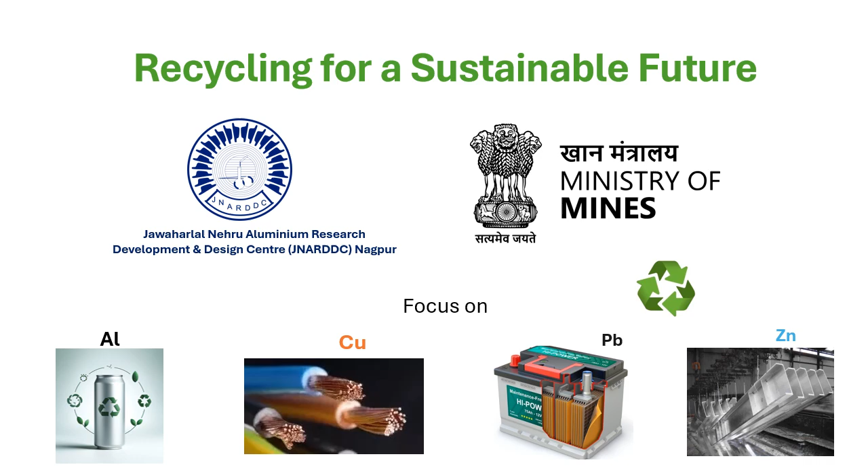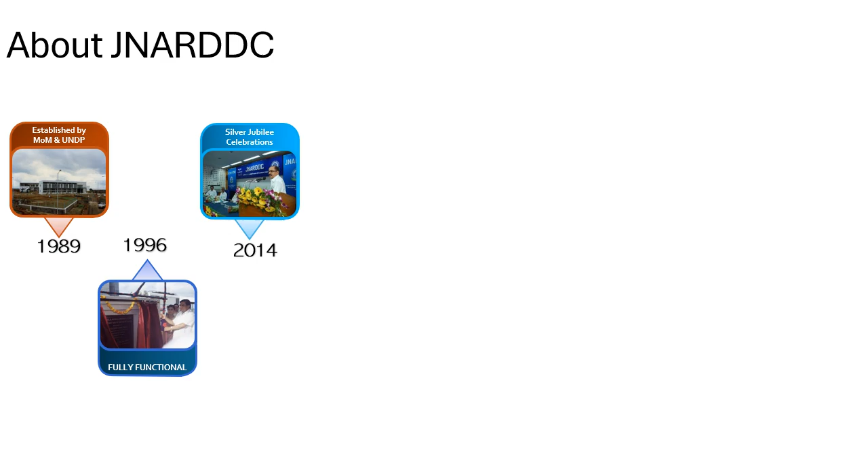JNARDDC, established in 1989 under the Ministry of Mines and UNDP, has been a beacon for the aluminum industry since becoming fully operational in 1996. The institute reached new heights in 2014 under the leadership of Dr. Anupam Agnihotri as director. In 2020, we acquired a state-of-the-art 14 meganewton capacity direct extrusion press, significantly advancing our research

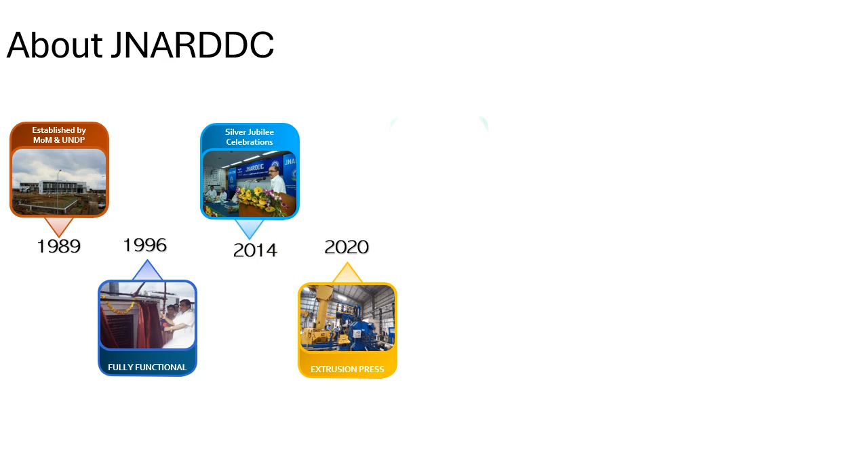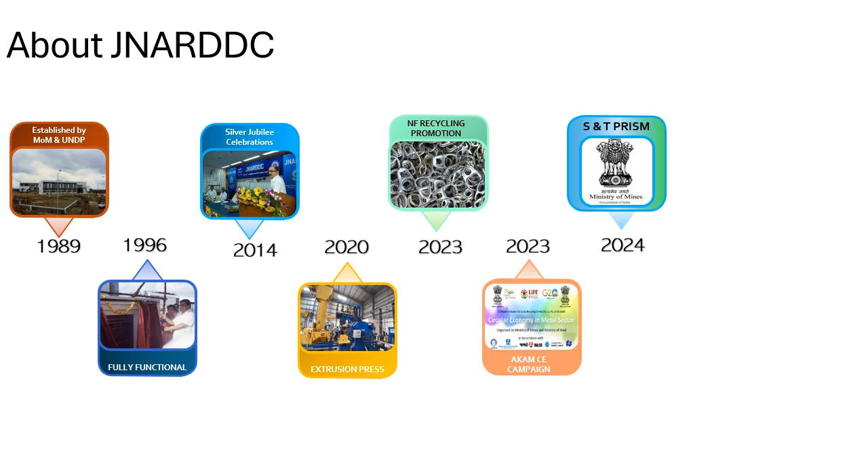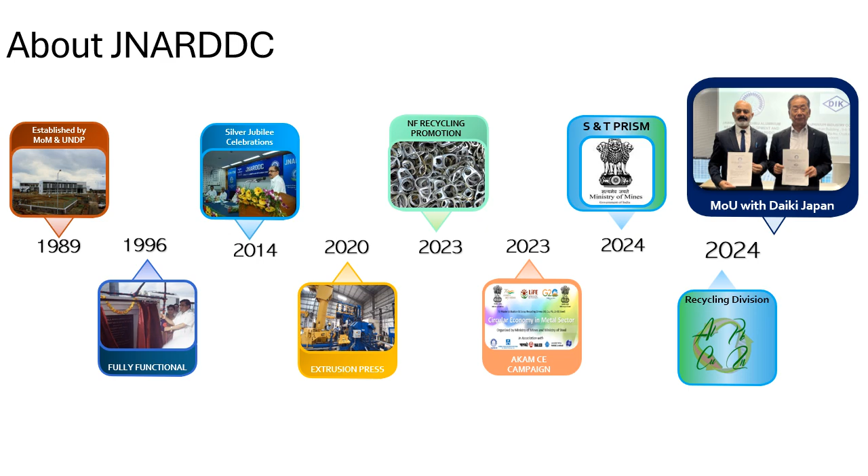and capabilities. By 2023, JNARDDC was recognized as a recycling promotion body, leading national campaigns on the circular economy. In 2024, we were entrusted with implementing the S&T PRISM program for startups, fostering innovation. This year also marked the establishment of our dedicated recycling division and a strategic MOU with Daiki Japan to enhance technical expertise in recycling. Our journey is a testament to JNARDDC's unwavering commitment to innovation, sustainability, and industry leadership.

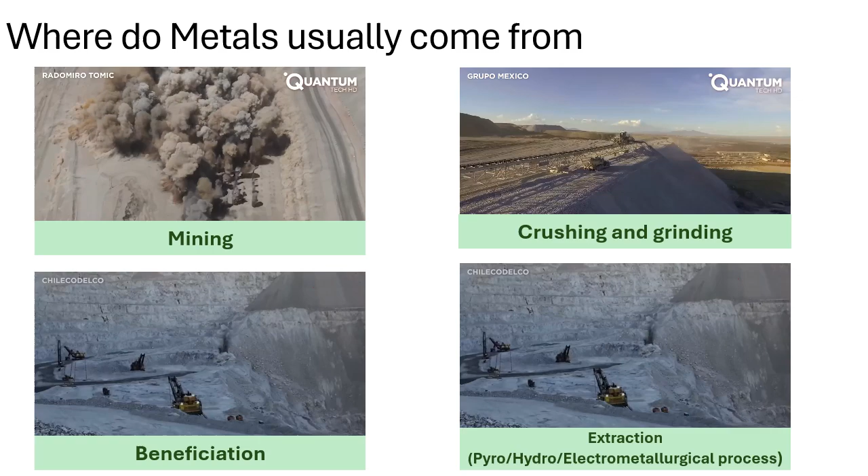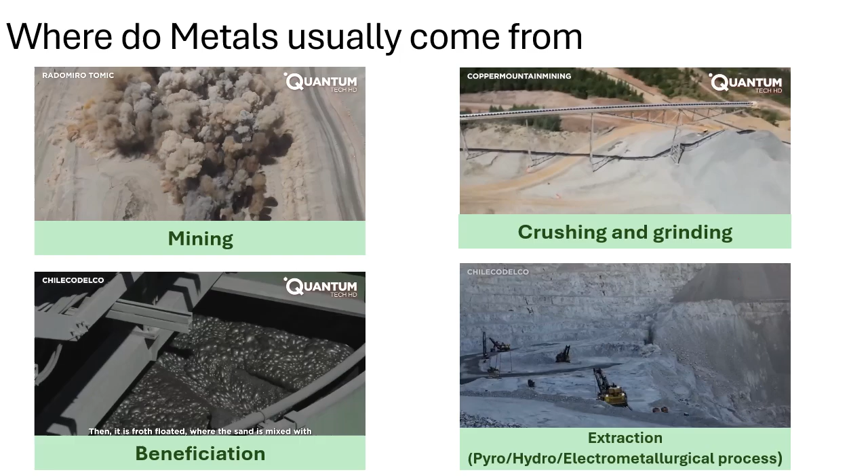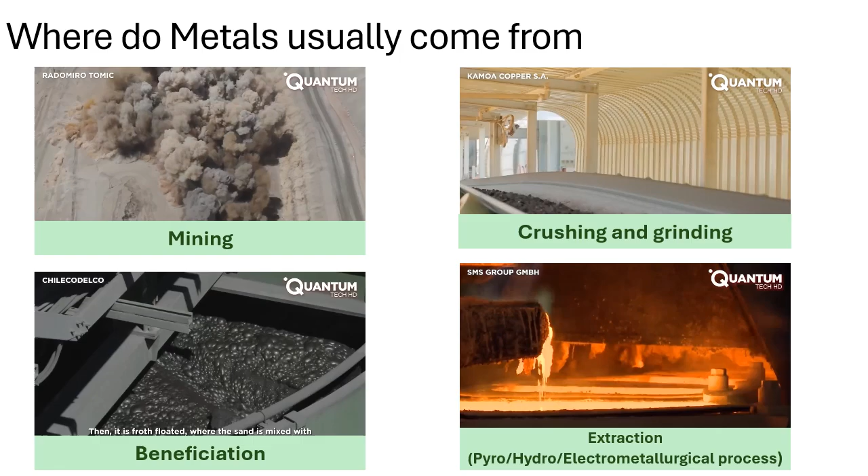Metals are typically obtained through mining, which marks the first stage of their journey. Once the ore is extracted, it undergoes crushing and grinding to reduce its size and prepare it for further processing. The next step is beneficiation, where valuable minerals are separated from the waste material using physical or chemical methods. Finally, the extracted material is processed into pure metals through hydro, pyro, or electrometallurgical techniques. These processes form the backbone of primary metal production, providing essential materials for industries worldwide.

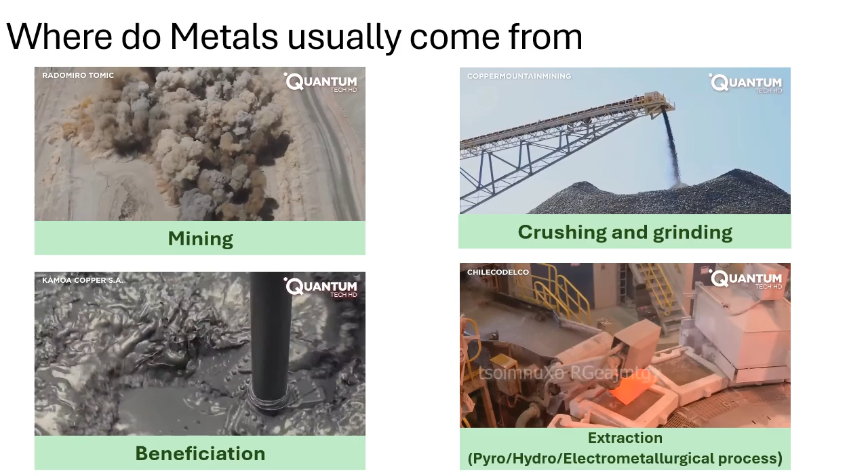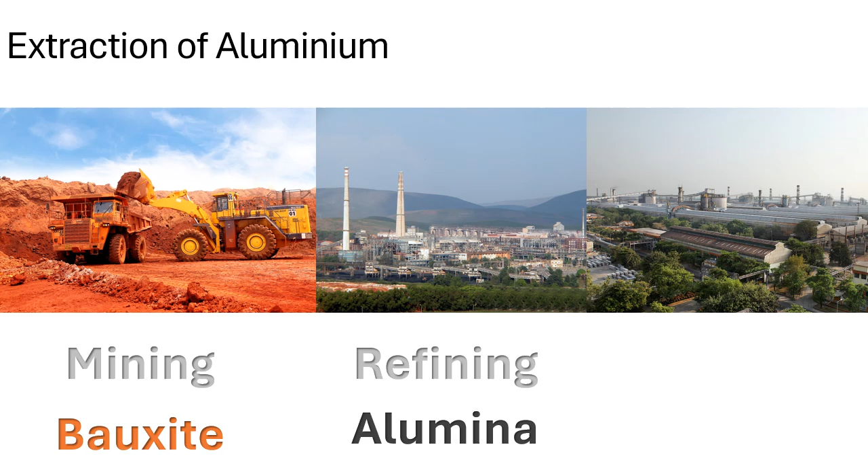Aluminum is primarily extracted from bauxite ore. The process begins with mining bauxite, which is then refined through beneficiation into alumina using the Bayer process. Alumina is further processed in smelters through the energy-intensive Hall-Héroult process to produce aluminum. This production method requires approximately 14 to 16 megawatt-hours of electricity per ton of aluminum, contributing to greenhouse gas emissions of about 10 to 13 metric tons of CO2 equivalent per ton. This highlights the importance of transitioning to sustainable practices, including increased recycling to reduce energy use and emissions in the aluminum industry.

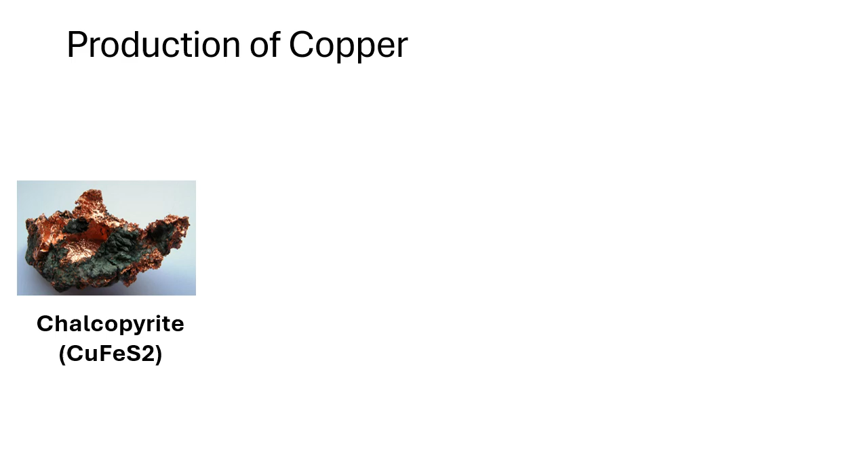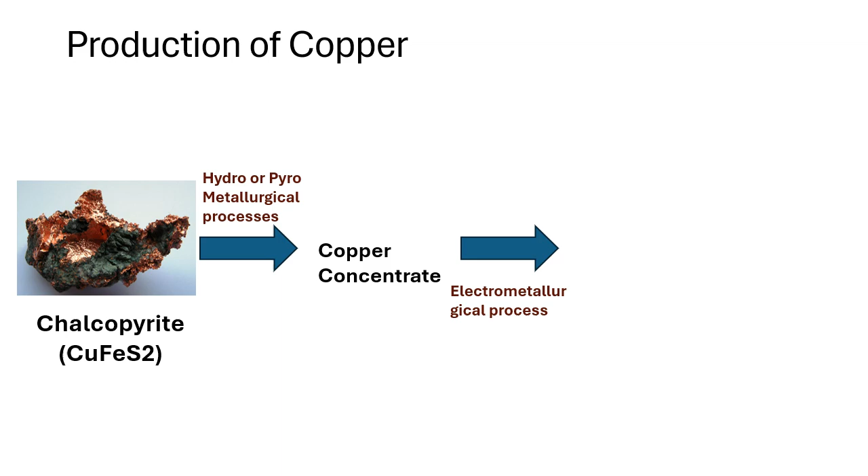Copper is primarily extracted from chalcopyrite, a copper iron sulfide mineral. The process begins with mining the ore, followed by crushing, grinding, and concentration through froth flotation to produce a copper-rich concentrate. This concentrate undergoes smelting to remove impurities, resulting in blister copper, which is further refined through electrolysis to produce pure copper. Extracting copper from chalcopyrite requires significant energy, around 30 to 40 gigajoules per ton, and generates greenhouse gas emissions of approximately 2 to 3 metric tons of CO2 equivalent per ton of copper.

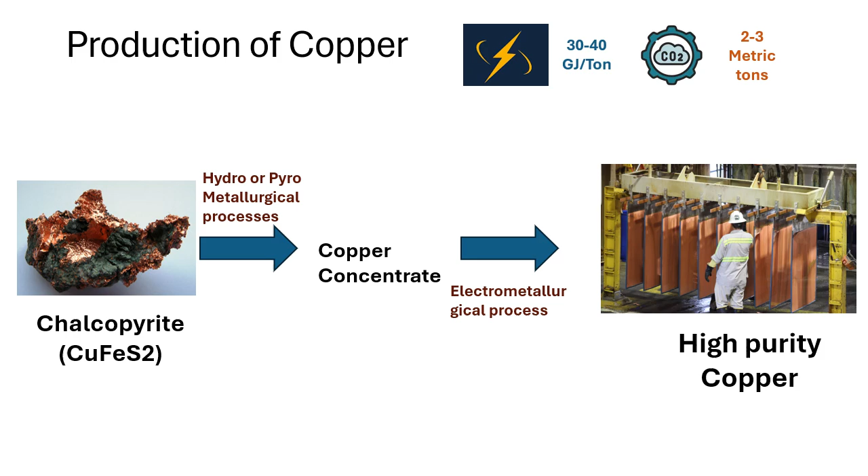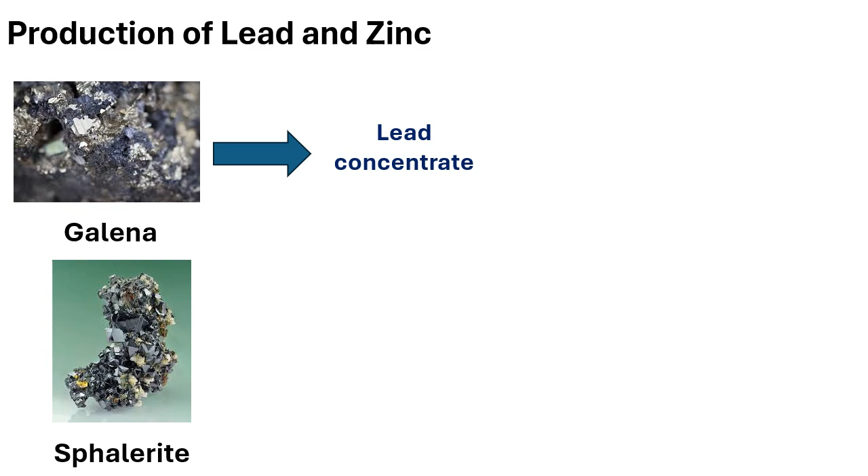Lead and zinc are often extracted from sulfide ores such as galena for lead and sphalerite for zinc. The process involves mining, crushing, and grinding, followed by froth flotation to concentrate the ores. For lead, the concentrate is processed through roasting, smelting, and refining, while zinc undergoes roasting to produce zinc oxide, followed by leaching, purification, and electrolysis to extract pure zinc. Lead production requires about 2 to 4 gigajoules of energy per ton and emits approximately 1.5 to 2 metric tons of CO2 equivalent per ton. Zinc production is more energy intensive, requiring around 8 to 10 gigajoules per ton and generating 3 to 4 metric tons of CO2 equivalent per ton.

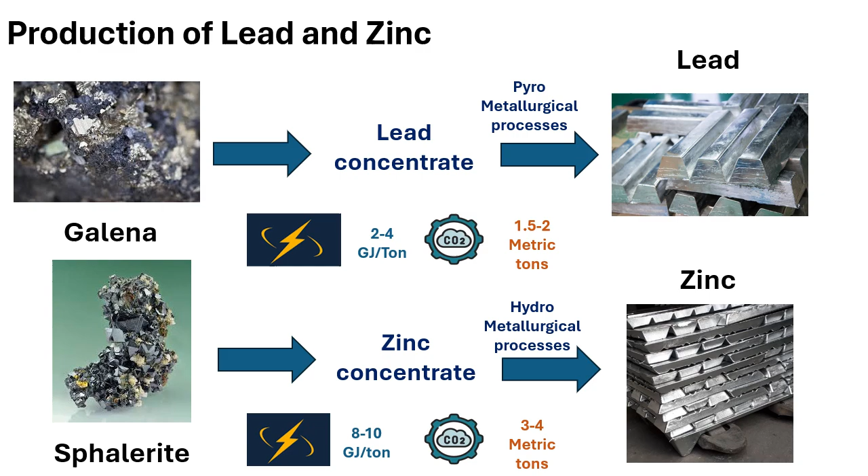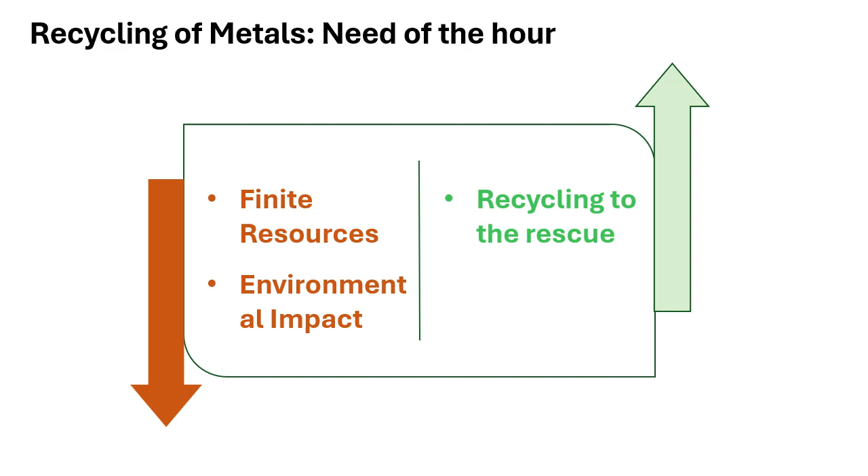Our planet's finite resources are under immense pressure. The Earth's crust contains limited reserves of metals, and with continuous extraction, these vital resources are depleting at an alarming rate. Metal mining and extraction also take a heavy toll on the environment, causing habitat destruction, water pollution, and significant greenhouse gas emissions. This is where recycling becomes the need of the hour. By recycling metals, we reduce the demand for virgin materials, conserve precious natural resources, and minimize our environmental impact. Prioritizing metal recycling is not just an option. It's a necessity to ensure resource availability for future generations and to build a sustainable, circular economy.

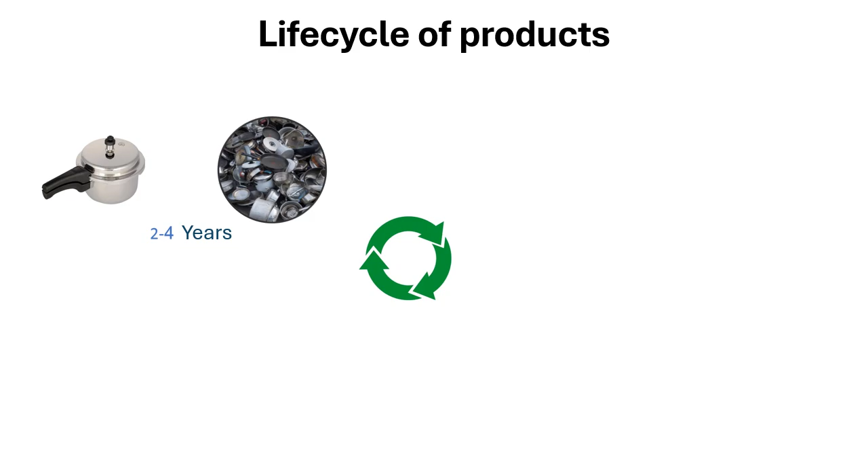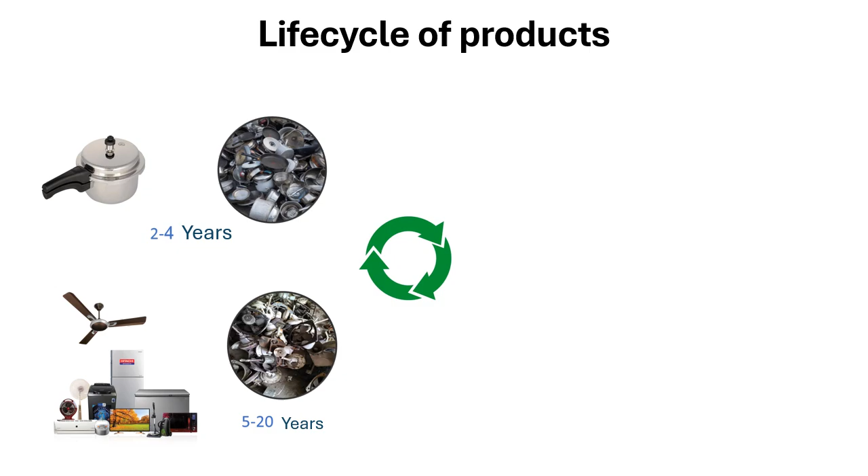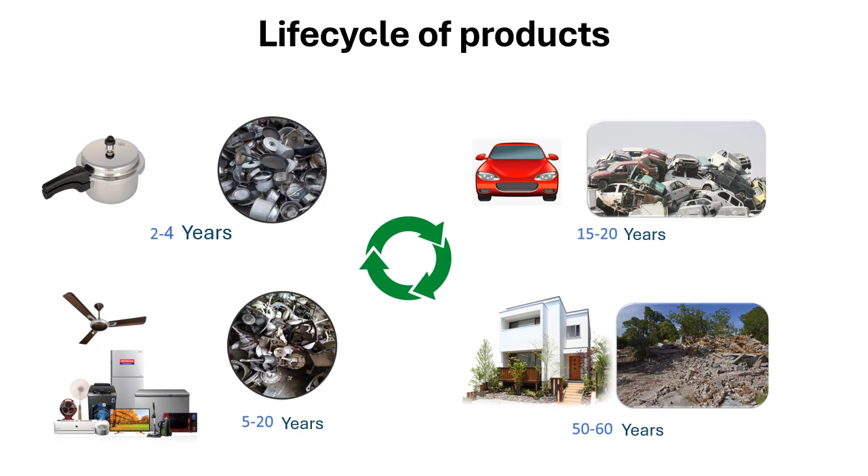Once these products reach the end of their useful life, they become a valuable source for recycling, contributing to resource conservation. For example, utensils, which are widely used in households, have a life cycle of about 2 to 4 years before they are often discarded. Electronic appliances, like laptops and phones, serve their purpose for 5 to 20 years, depending on the type and usage. Automobiles, made with components like aluminum and copper, have a lifespan of around 15 to 20 years. Meanwhile, building and construction materials, such as aluminum doors and copper wiring, are the most enduring, with life cycles ranging from 50 to 60 years. Once these products reach their end of life, recycling allows the recovery of valuable metals, reducing dependence on primary resources and promoting a circular economy.

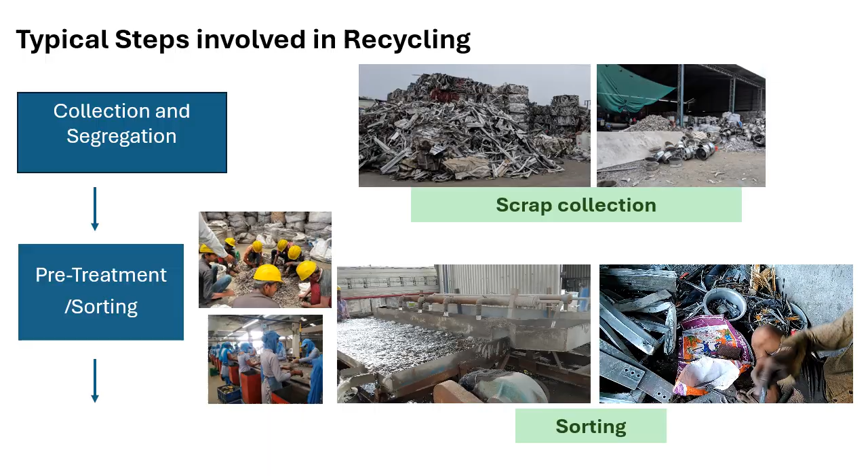Recycling non-ferrous metal scrap involves several key steps. First, the scrap is collected from various sources like industrial sites or consumers and taken to a recycling facility. Next, segregation happens where different non-ferrous metals such as aluminum, copper, and brass are sorted from other materials. During the pre-treatment stage, manual sorting is done by workers to remove contaminants like plastics or other non-metallic materials. A gravity shaker is also used to separate metals based on weight. Heavier metals like copper sink, while lighter ones like aluminum stay on top, making further sorting easier. These steps, collection, segregation, and pre-treatment, ensure that non-ferrous metals are efficiently recycled and ready for reuse.

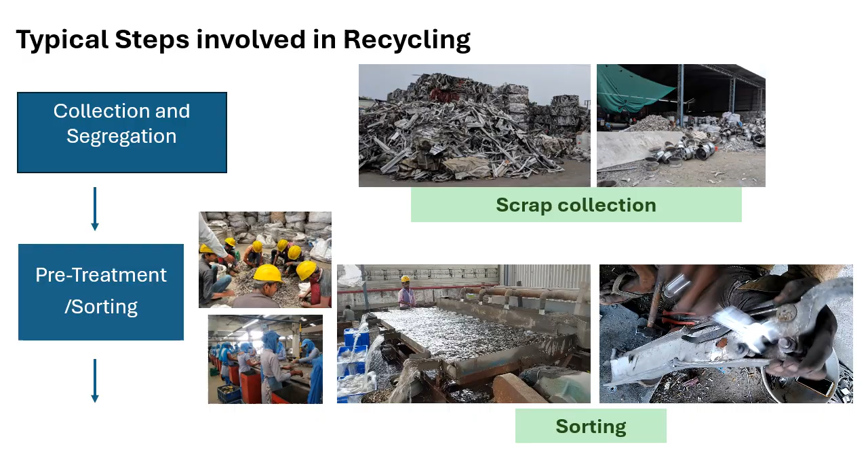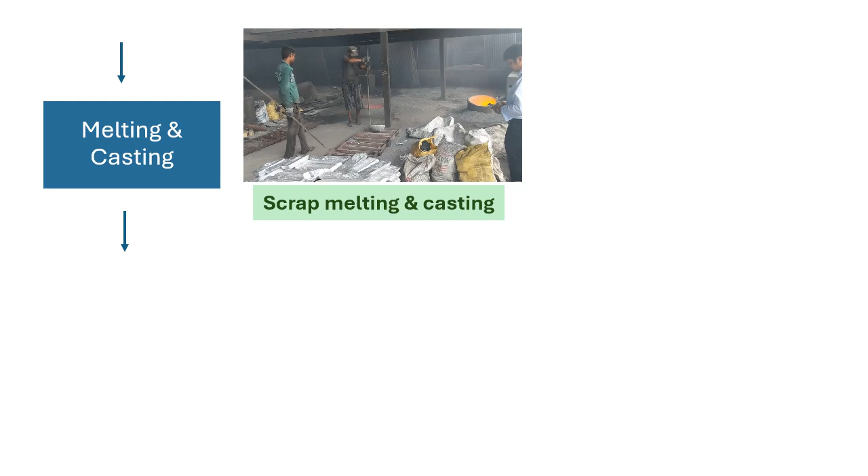After the pre-treatment operation, processed scrap is subjected to melting the materials, such as aluminum, copper, or brass, in high-temperature furnaces. The scrap is transformed into molten metal, which is then poured into molds for casting, forming ingots or billets that are cooled and solidified for further use.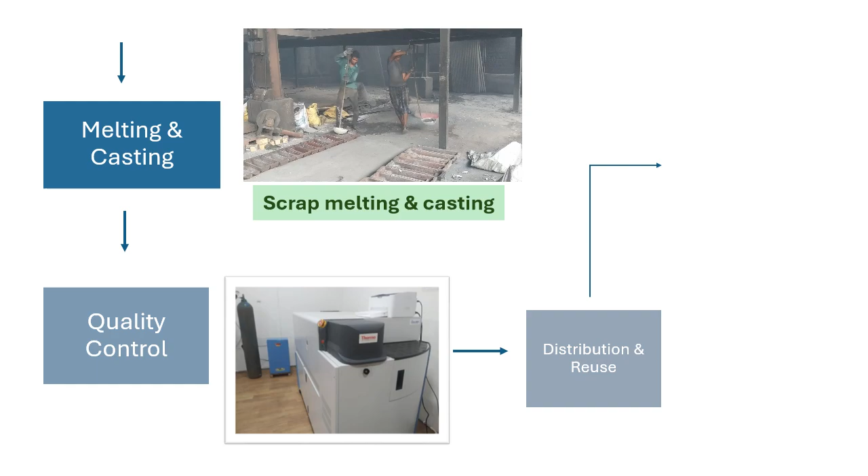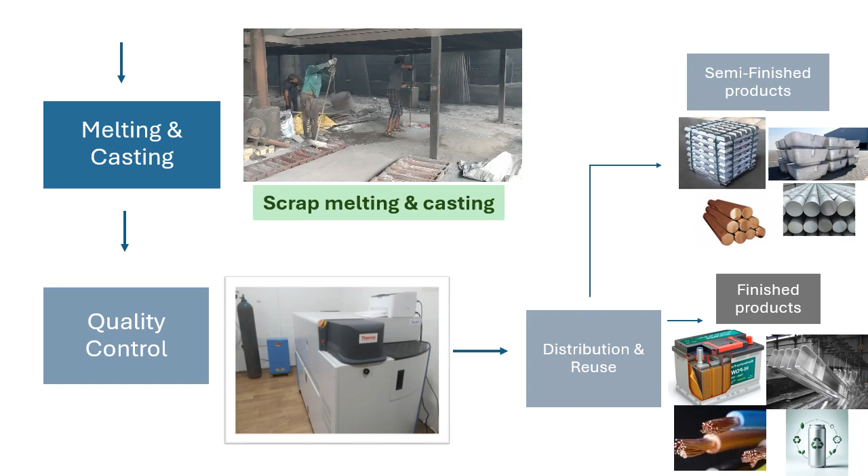Quality control is critical throughout the process. The chemical composition of the molten metal is tested to ensure it meets the required specifications for strength, durability, and other properties. Once the quality is verified, the cast metals are used to produce semi-finished products, like sheets, rods, or wires, or finished products like electrical components, automotive parts, or industrial equipment. These steps ensure non-ferrous metals are efficiently recycled into high-quality products for various industries.

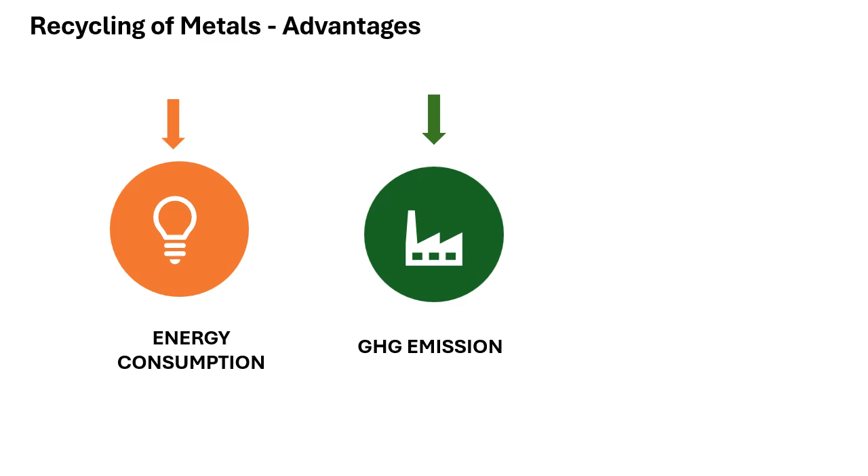First, recycling helps reduce energy consumption. Manufacturing products from recycled materials typically uses far less energy than creating them from raw resources. For instance, recycling aluminum saves up to 95% of the energy required to make it from bauxite ore. Second, recycling significantly cuts greenhouse gas emissions. By reducing the need to extract and process raw materials, we lower the emissions that contribute to climate change.

Lastly, recycling helps reduce the amount of waste that ends up in landfills or pollutes our environment. By reusing materials, we minimize the strain on landfills and decrease the harmful effects of improper waste disposal, like soil and water contamination. Recycling is simple but so impactful. Let's do our part and recycle responsibly.

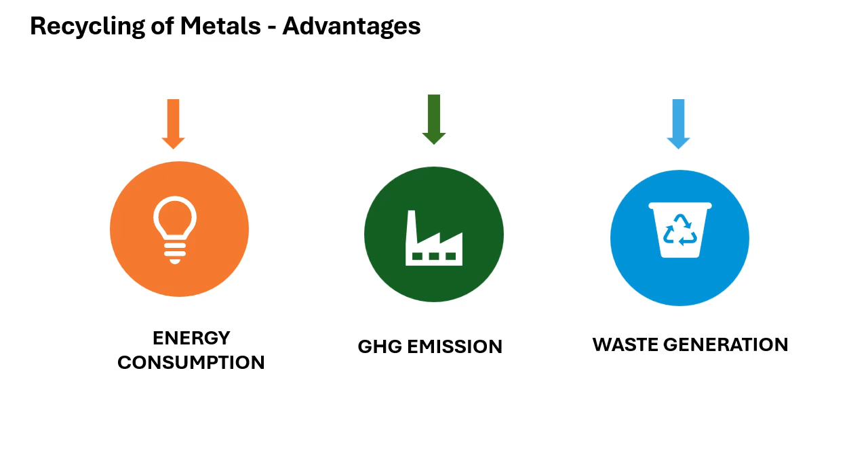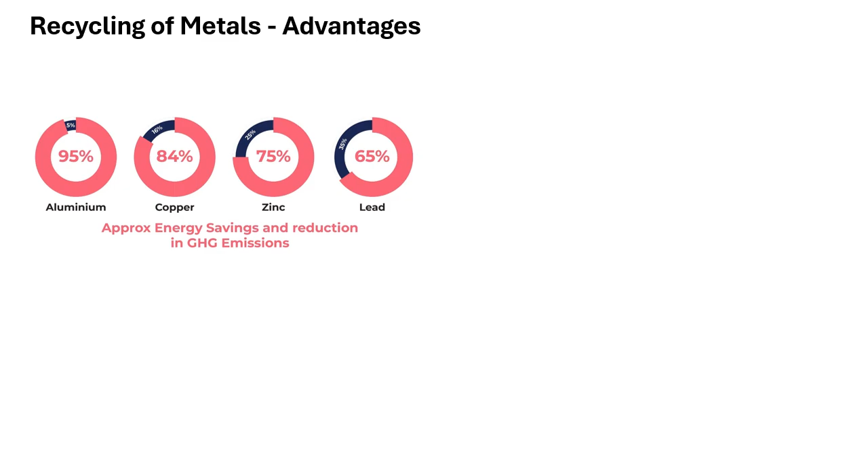Recycling metals is a game changer for the environment. For instance, recycling aluminum reduces greenhouse gas emissions by an impressive 95%, while copper cuts emissions by 84%, zinc by 75%, and lead by 65%. These reductions play a critical role in combating climate change by minimizing the energy-intensive processes of mining and refining raw materials. Beyond emissions, recycling is central to the circular economy. By keeping materials in use for as long as possible, we reduce waste, conserve natural resources, and ensure that products have a life beyond their initial use.

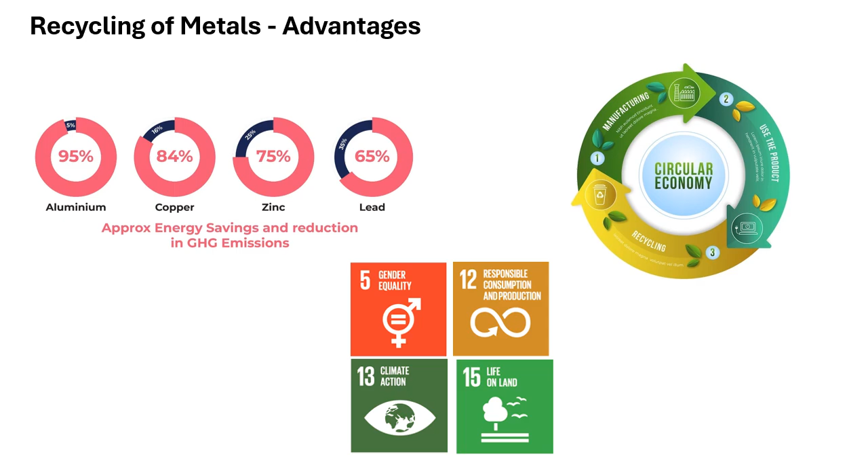Importantly, recycling aligns with global sustainable development goals. It advances SDG 12, responsible consumption and production, helps mitigate climate change under SDG 13, promotes sustainable ecosystems for SDG 15, and even supports gender equality, SDG 5, by creating equitable economic opportunities in the recycling industry.

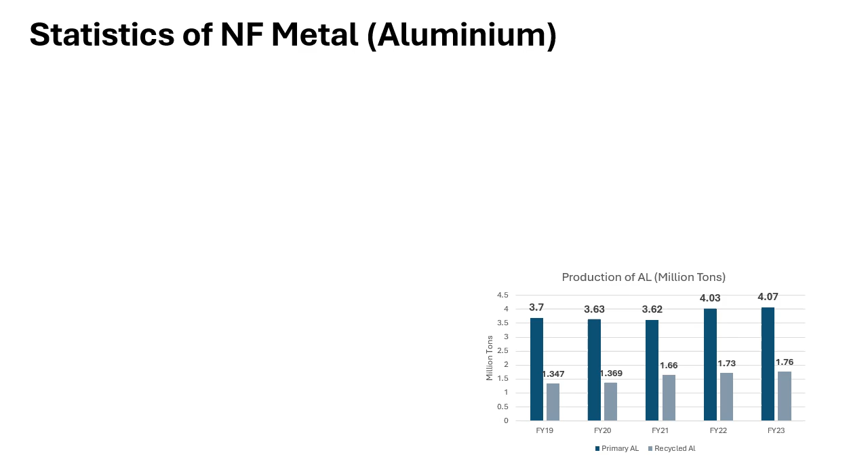Over the past 5 years, aluminum recycling has seen significant growth as industries and consumers embrace more sustainable practices. Currently, the primary production of aluminum stands at 4.1 million tons, while secondary production from recycling has reached 1.76 million tons. A pie chart of secondary aluminum applications highlights its wide-ranging uses, from construction and transportation to packaging and electronics. It's a vital material driving sustainability across multiple sectors.

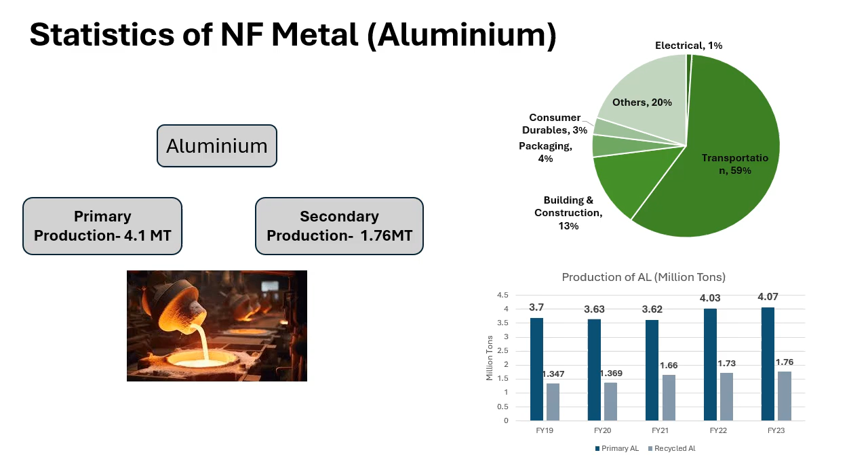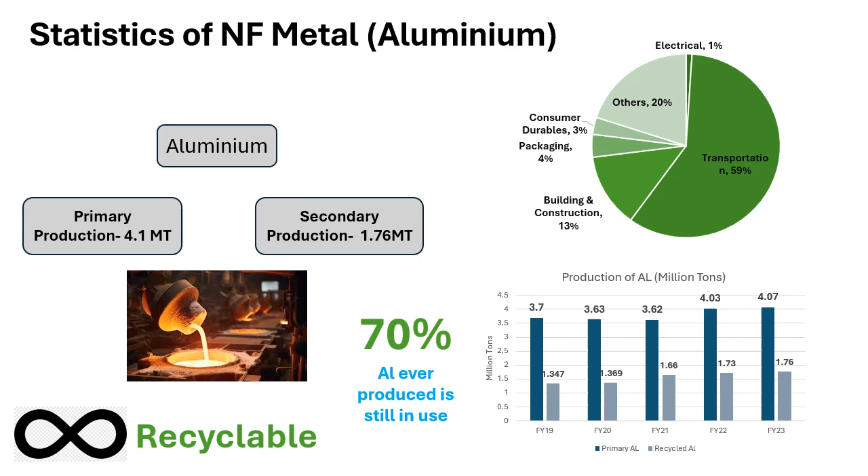The benefits of recycling aluminum are incredible. It uses only about 5% of the energy required for primary production, leading to 95% fewer greenhouse gas emissions. This makes recycling a critical tool in reducing the environmental footprint of aluminum production. Remarkably, 70% of all aluminum ever produced is still in use today, thanks to its infinite recyclability. This showcases aluminum's vital role in building a circular economy, where materials are reused rather than wasted.

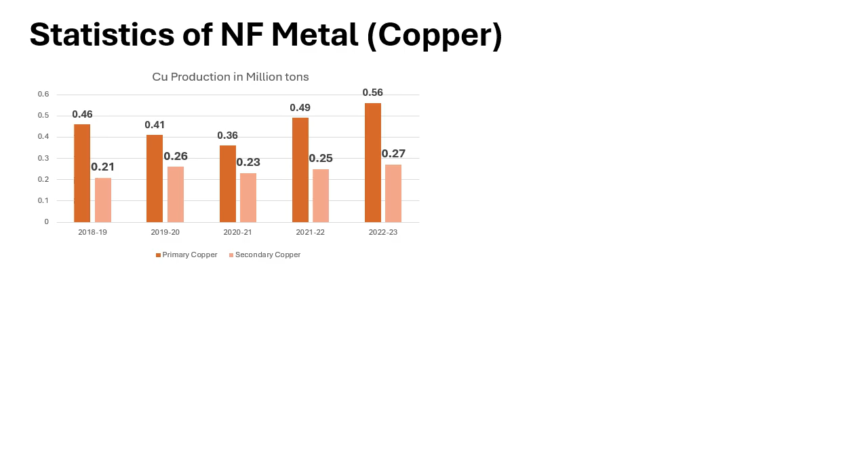Over the past 5 years, copper recycling has seen remarkable growth, reflecting global efforts to embrace greener practices. Today, primary copper production is at 0.56 million tons, while secondary production from recycling has grown to 0.27 million tons. A pie chart of secondary copper applications reveals its wide use in industries like construction, electronics, and renewable energy. Recycled copper is essential for wiring, motors, and even in green technologies like solar panels and wind turbines.

Recycling copper is highly efficient. It requires up to 85% less energy than primary production and results in significantly lower greenhouse gas emissions, making it a vital step in reducing our environmental footprint. Plus, 80% of all copper ever mined is still in use today. Its durability and recyclability make it a cornerstone of the circular economy.

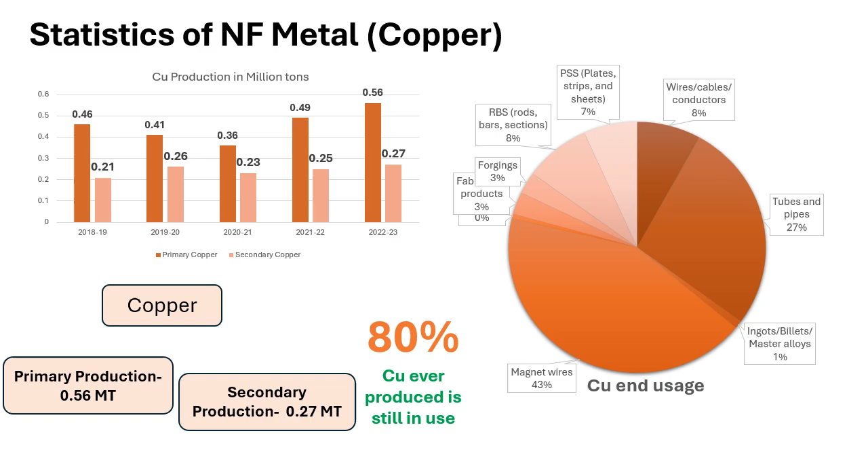Over the past 5 years, lead recycling has seen substantial growth, reflecting the shift towards greener circular economies. Currently, primary lead production stands at 0.21 million tons, while secondary production from recycling has surged to an impressive 0.9 million tons. A pie chart showcasing secondary lead applications highlights its critical use in batteries, especially for vehicles and renewable energy storage systems. Other uses include radiation shielding, cable sheathing, and certain construction materials.

Recycling lead is incredibly energy efficient. It requires up to 60% less energy than primary production. Plus, it significantly reduces greenhouse gas emissions, helping to combat climate change.

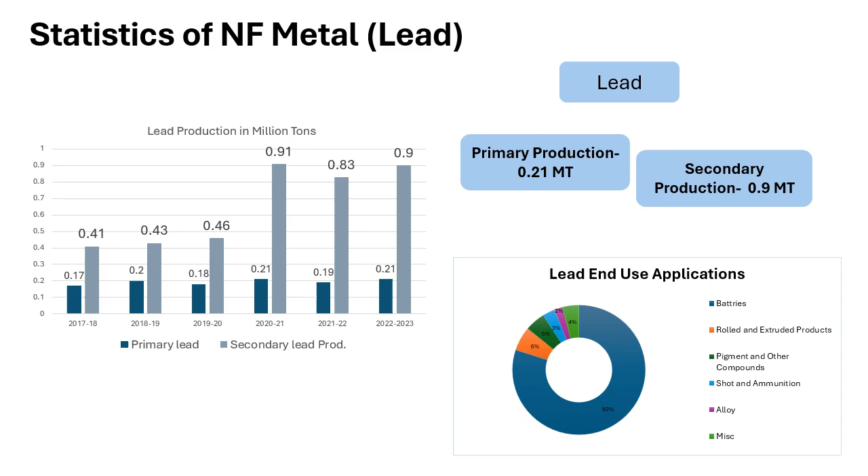Over the past 5 years, zinc recycling has seen steady growth as industries prioritize sustainability. Currently, primary zinc production stands at 0.82 million tons, while secondary production from recycling has reached 0.09 million tons. Though smaller in scale, secondary zinc plays a vital role in meeting demand and reducing environmental impacts. A pie chart of secondary zinc applications shows its extensive use in galvanizing steel for corrosion resistance, as well as in batteries, alloys, and even fertilizers. Recycled zinc supports a wide range of industries critical to modern life.

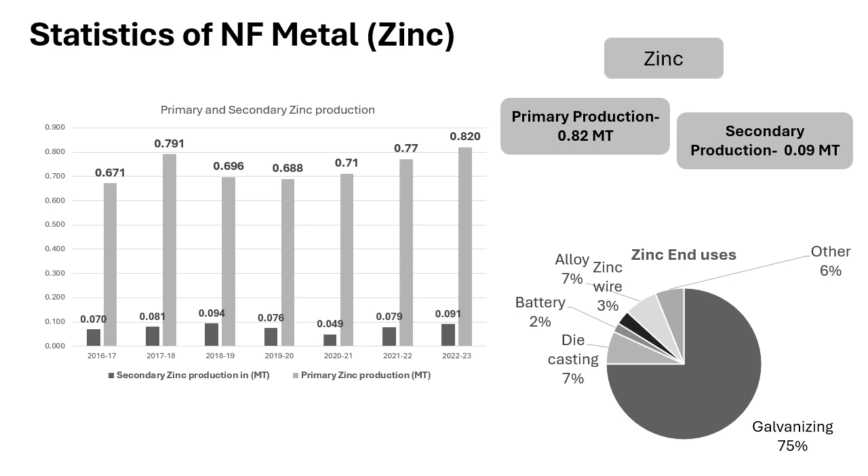Recycling zinc requires up to 75% less energy compared to primary production and significantly lowers greenhouse gas emissions, making it a crucial step toward greener industrial practices. Zinc has a high recyclability rate. More than 30% of the zinc used globally comes from recycled sources, reducing the strain on natural resources.

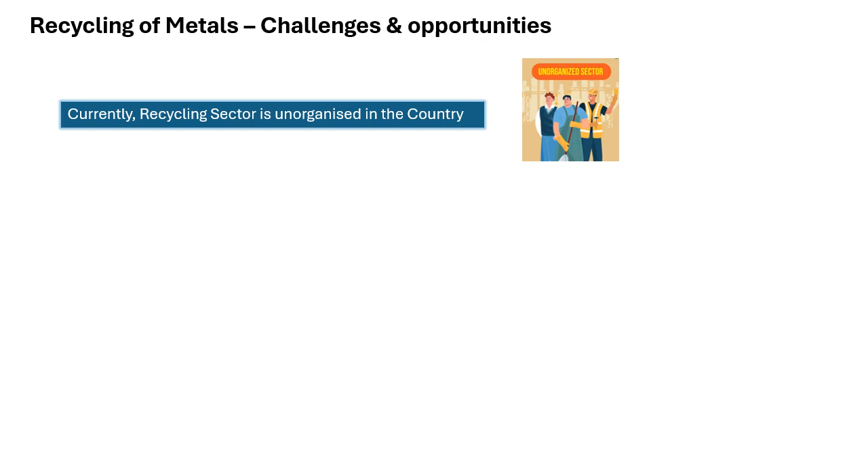One major challenge is that the non-ferrous metal recycling sector remains largely unorganized. This creates hurdles in standardizing processes, ensuring quality, and tracking environmental compliance. However, with every challenge comes opportunity, and strides are being made to formalize this sector. To address this, the Jawaharlal Nehru Aluminium Research, Development and Design Center, JNARDDC, has been entrusted with the critical responsibility of promoting recycling in the non-ferrous metal industry. They are spearheading initiatives to streamline operations, improve sustainability, and enhance transparency.

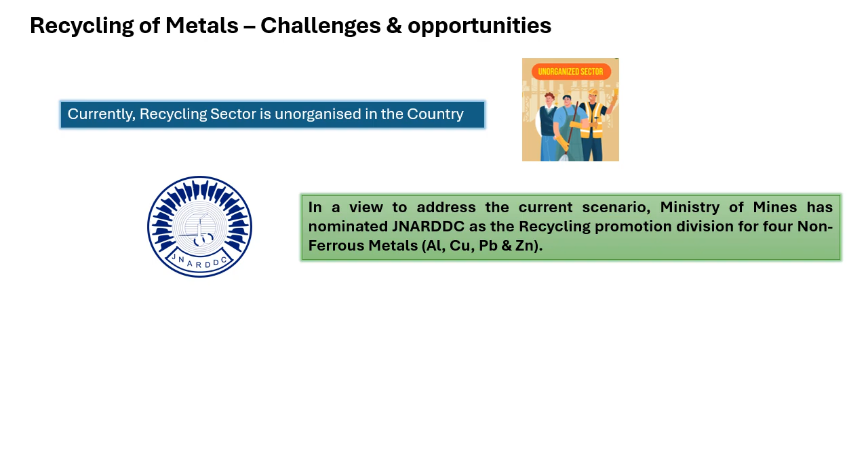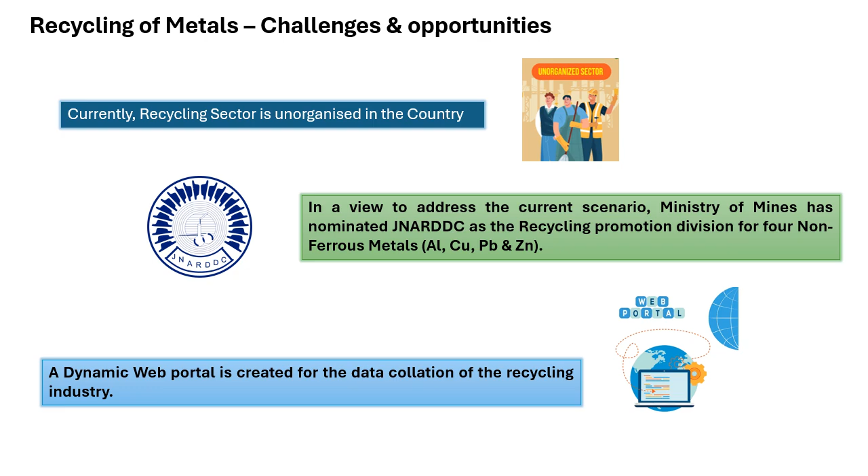A key milestone in this effort is the creation of a dynamic web portal. This platform is designed to collate data, assess industry performance, and provide ratings, offering valuable insights to stakeholders. It also facilitates the implementation of Extended Producer Responsibility, EPR, ensuring that industries take ownership of the environmental impact of their products throughout their life cycle. These steps represent a significant opportunity to transform recycling into a more structured, efficient, and eco-friendly process. Together, we can build a more sustainable future for the non-ferrous metal industry.